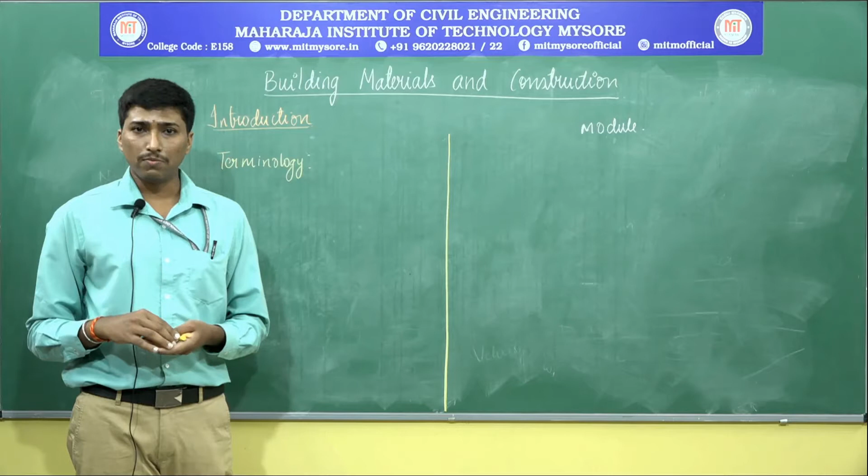Now let us get to know the terminology related to building materials and construction. If you take the term building materials and construction individually, and refer to any dictionary meaning, building refers to the erection of walls with enclosures along with the roof, doors and windows. We call it a building. Whereas material means two or more simpler substances or elements that combine to form a complex substance or compound. This may be either solid or semi-solid in state.

Finally, we come across materials which are naturally available as well as artificially available. Naturally available materials may be in a pure or impure state, whereas artificially available materials are processed especially from raw materials.

Now moving on to construction. What is meant by construction? It is derived from the Latin word 'constructio', meaning together. The term construction refers to the orderly arrangement or assembly of materials in a design or properly planned manner. That is what we call construction.

Now, with respect to these terminologies - building, materials and construction - let us get to know them one by one. What is meant by a building I have already stated. Next is what are the different types of buildings, and why they are necessary. As we know, the basic amenities for human life or habitat to exist for a longer duration relate to food, cloth and shelter. Shelter is a basic amenity for human habitat settlement.

Moving on, why do we require buildings? We need to get protected from cold weather - that means external agencies, even rain, sunlight, snow, or any other extrinsic variables which try to hamper human settlement or habitat. Therefore, a building is an enclosure.

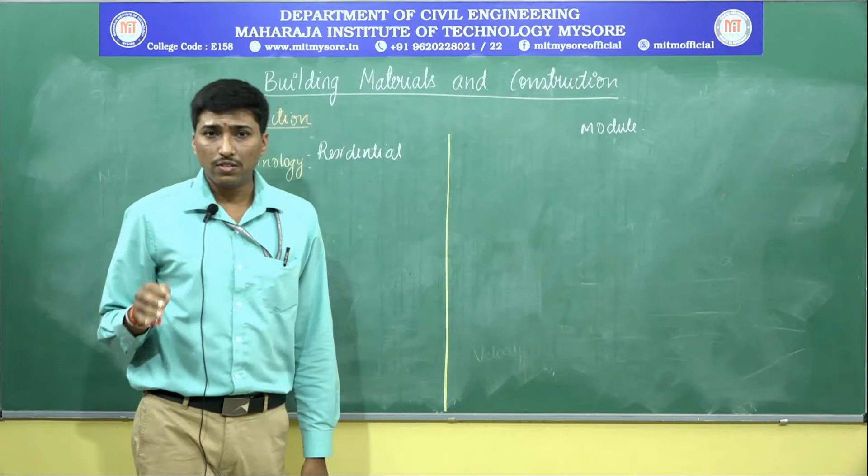And then, if the building is utilized especially for educational purposes, for schools or colleges, then we call it an institutional or educational building.

Next, if a building is completely utilized for the treatment of patients or for nursing purposes, then we call it a hospital or nursing home. Totally, we call this a healthcare type of building.

If the building is normally utilized for recreational purposes, such as cinema halls or theaters, or for cultural activities, then there is a separate category of establishment. Apart from this, if the building is mainly required for industrial manufacturing purposes, then we call it an industrial building.

Moving to the next type, after industrial buildings, the next set we normally utilize is for storage of large portions of manufactured goods or products, or there should be proper arrangement for procurement of raw materials and their placement. For that purpose, proper utilities must be provided. That kind of building is what we call a storage type of building.

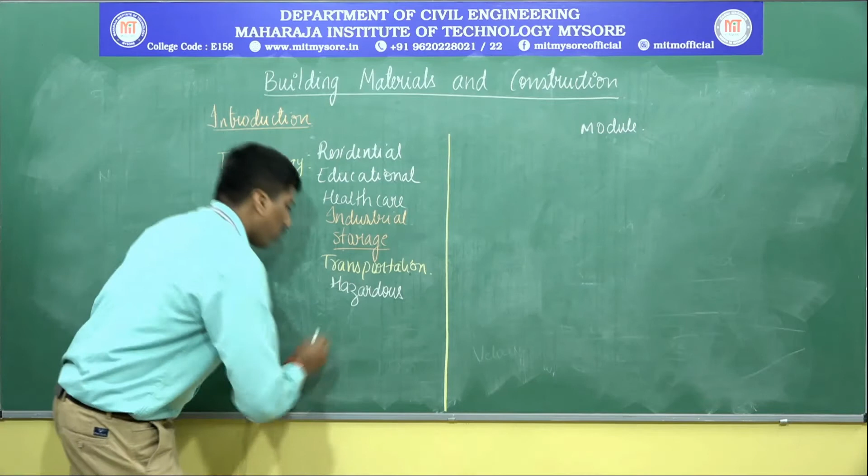Commercial establishments, as I mentioned earlier, we call commercial buildings. So these are the different sorts of buildings that we come across in our day-to-day life activities around us.

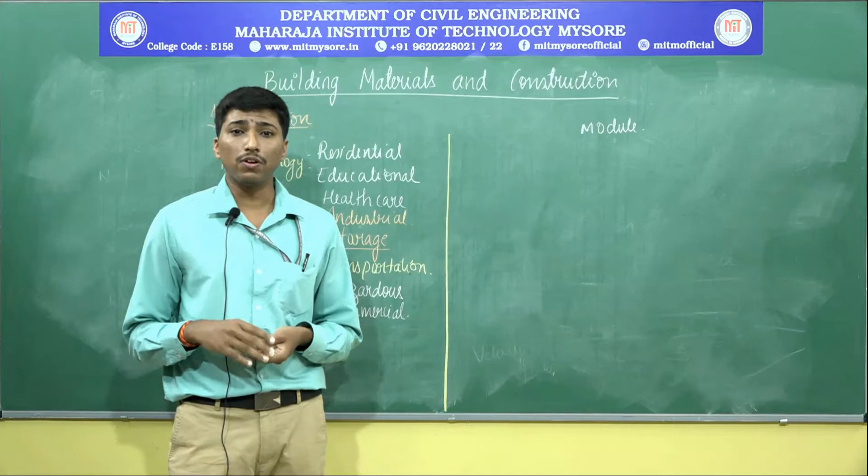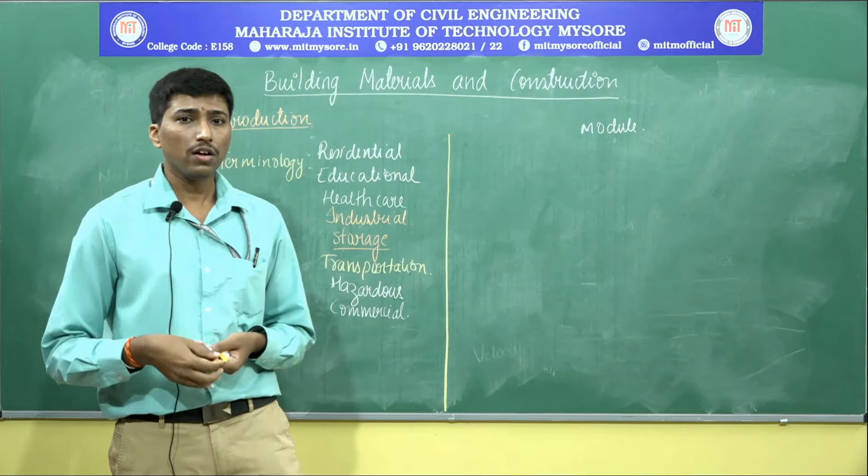Next, if I need to construct any sort of building, I require materials. The materials required for construction, or their selection, mainly depends upon certain parameters. What are those parameters? Let us list them, and then move on to the next part of the construction activities.

What does it refer to? Materials here mainly refer to substances that may be solid in state. This solid type of material has to be orderly arranged, fabricated, well framed and well designed. That orderly arrangement of material is what we come across in the construction phase of any building construction project.

The term 'build' refers to the execution of a task, starting from the planning of any large scale to small scale project, then proceeding to the activities, finally completing them, and leading to the operation and maintenance phase.

Moving on, the materials may be solid materials, which are available in different types. Stone is used as a building material, brick is also used as a building material. Cement aided with water, or cement aided with sand - what we call gravel in layman terms, or technically fine aggregate for sand and coarse aggregate for gravel.

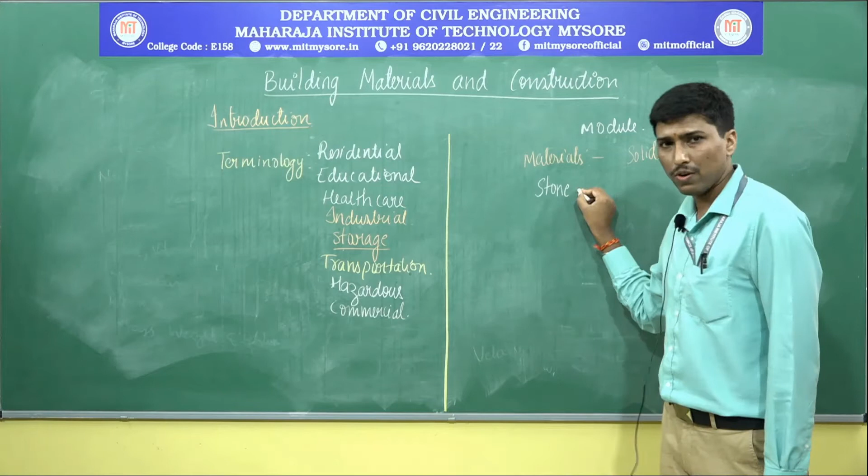Now let us know the list of materials utilized for construction, so it becomes easier for me to explain and convey what you'll study module-wise. So, materials: stone which we use, then we come across brick which is also used as a construction material, and with respect to the next development that took place, it is concrete blocks.

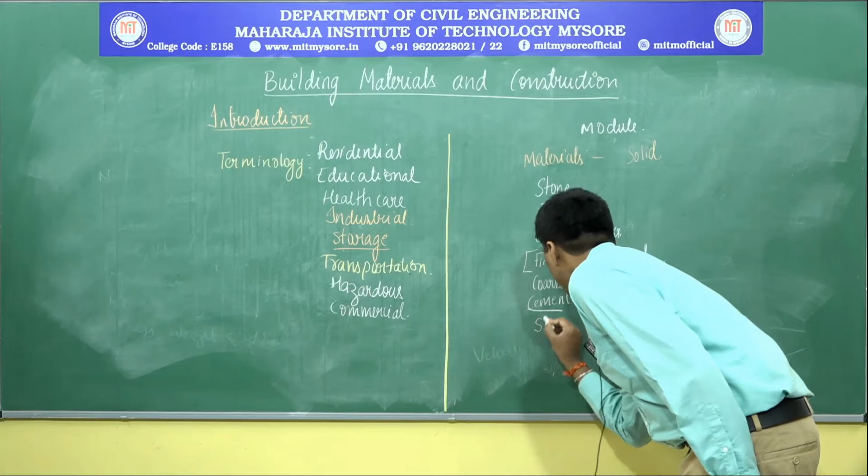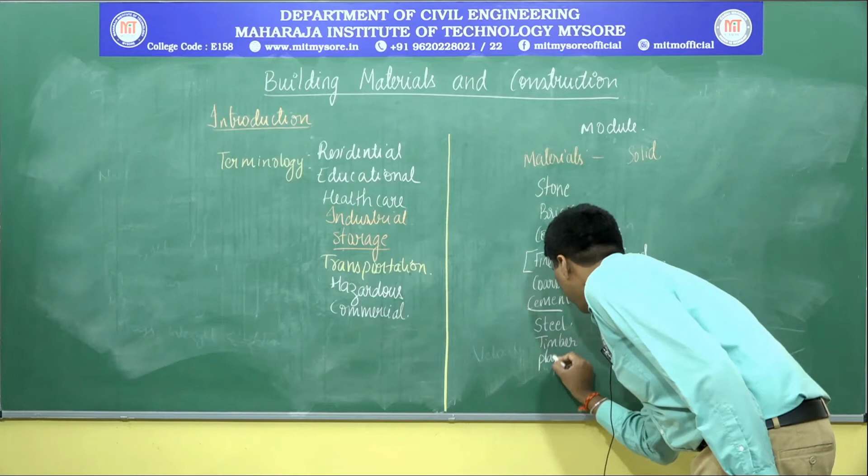Concrete blocks mainly consist of fine aggregate, coarse aggregate - we call it sand and gravel - and cement, which is used as a binding material. Along with this, one important aspect required is steel, and then you use timber and plastics. These are the different sorts of materials we utilize for construction.

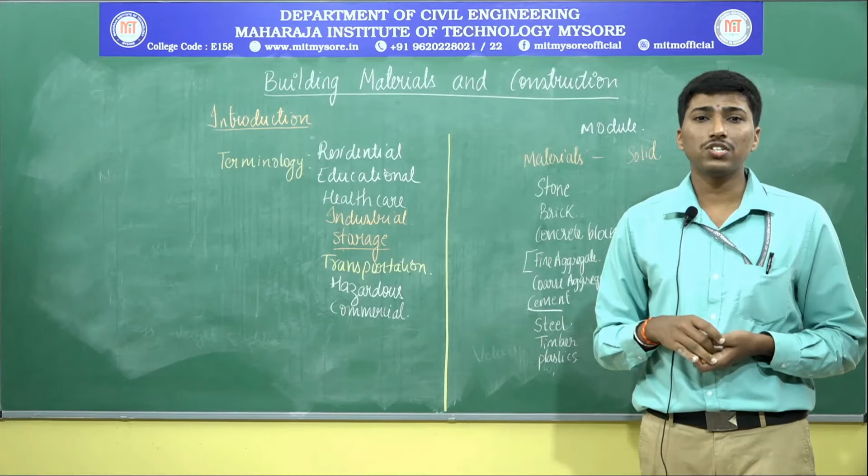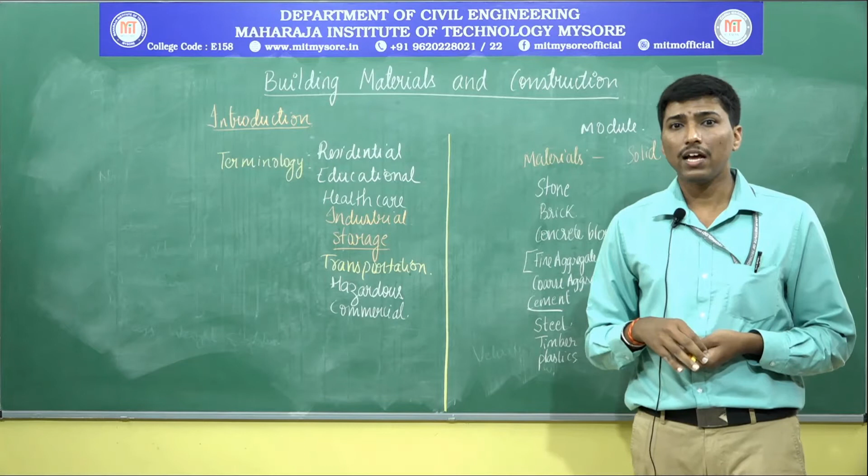Now building I have explained, and the materials utilized for construction activities are also explained. Moving on to the next stretch, what is meant by construction? Construction mainly refers to assembly of materials in an orderly manner so as to give aesthetic appearance and durability, so the life period of any structure will be more, and it is in accordance with the building codes set by local or regulating authorities.

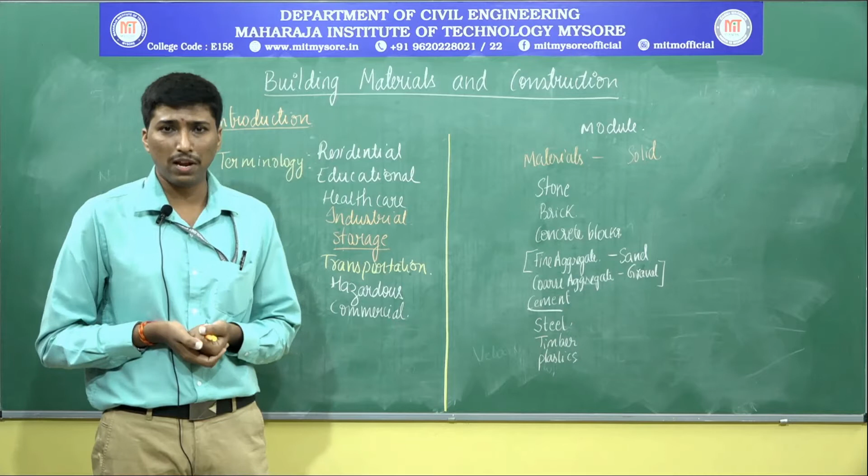Now, moving to the next aspect, it is construction means. Construction involves, in engineering, different sorts of terminology that have been explained. Whatever materials we take in engineering, not only in civil engineering but also in mechanical engineering, we come across different sorts of materials, especially metals, which are utilized to study the nature and the motion.

If you take the case of electronics, they study silicon and allied aspects, the materials needed for building circuits and designing them. Similarly, for a civil engineer, it varies from a small scale house or hut to large scale buildings or multifunctional types of buildings.

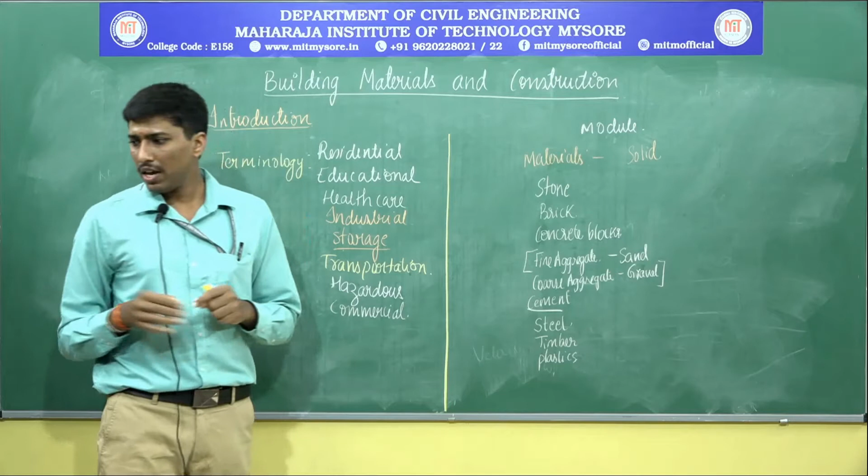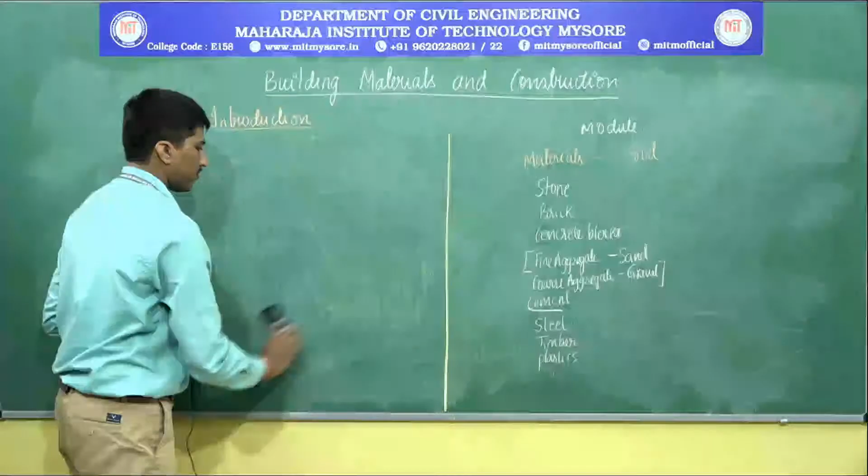Next, in construction aspects, let us get into construction. Mainly it involves proper planning. What does this planning refer to? That means drafting out what things or materials are required, and before you go for the actual construction work.

Preliminary field work has to be done. Later onwards, you go for having an actual plan of what you need to build in that particular place. This proper planning also ensures what kind of materials are required, whether it may be stone or any other sorts of materials being utilized.

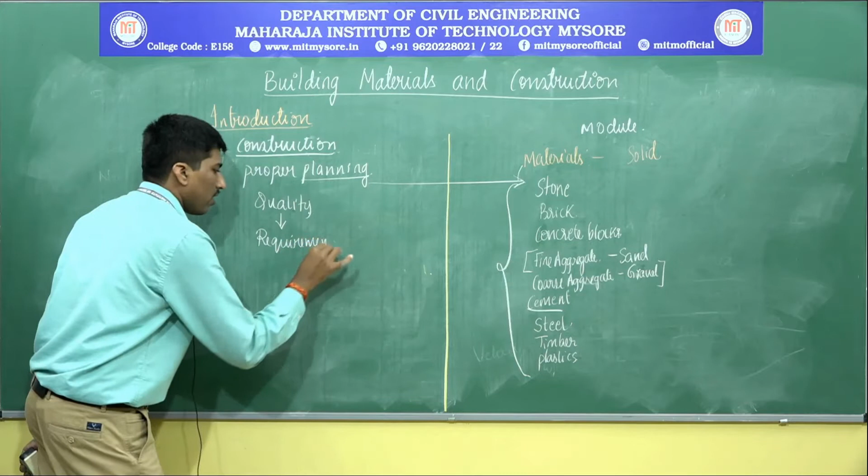Now, proper planning should ensure that good quality materials are utilized for the construction purpose. The quality has to be good, and this is the requirement for every person who resides in their home in a safe manner. If the quality is not good, whatever building materials you utilize, the life period will be much shorter.

The next aspect you're going to study is related to the requirement and the economic concern. What is meant by economic concern? Economic concern is mainly related to utilization of all these materials at an optimal cost.

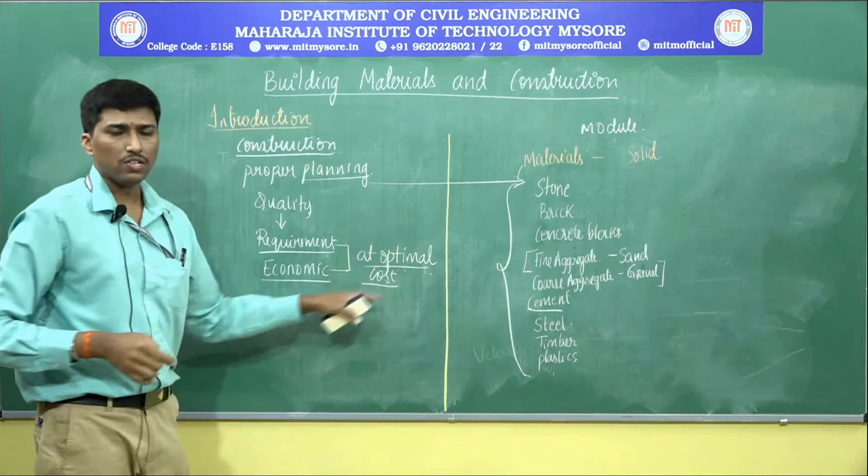It should be much reliable, feasible, easily available, and it should also be reliable, so that whatever cost is being utilized shall not be too much burden for the people, and should not cause any financial deficit for them. So we need to see that financial concern is also a major part of construction activities.

So based upon the quality of materials required, now I have the materials. If you want them for construction activities, raw materials cannot be directly utilized. Instead, you need to synthesize or process the raw materials.

Synthesizing or processing the raw materials will be done either through different sorts of industries, or they will be naturally utilized, or artificially driven up, or finished based upon the customer's requirements.

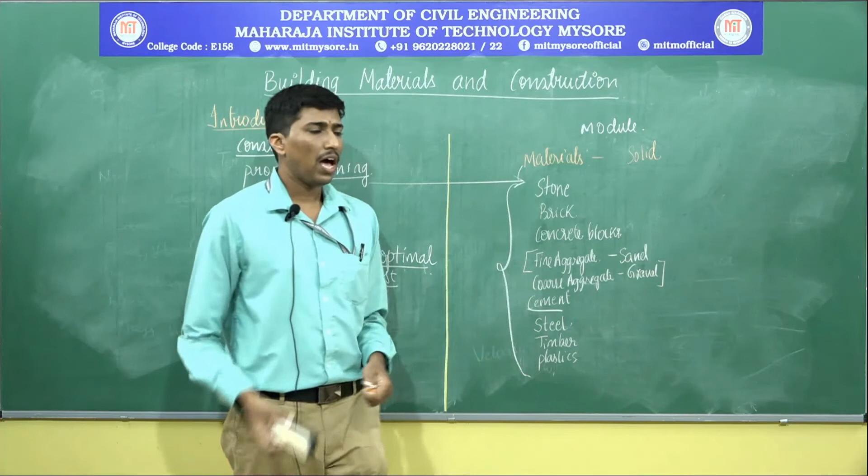So here mainly we need to look at the concept of how materials are available. If the materials are available in raw form, how do you need to convert them into a usable form? So whatever raw materials are available, they are to be processed, and after processing or synthesizing, we come across getting the desirable product as an output.

This desirable product is the major concern for the utility of the work.

Any material you take, whether it may be stone, is not normally available directly, so they need to go for quarrying. Next, they need to blast the rocks available in the earth, and extract it, and further get the desirable product before it can be utilized. Similarly, in the case of brick, concrete blocks, cement, fine aggregate, coarse aggregate, or ceramic materials, all those things.

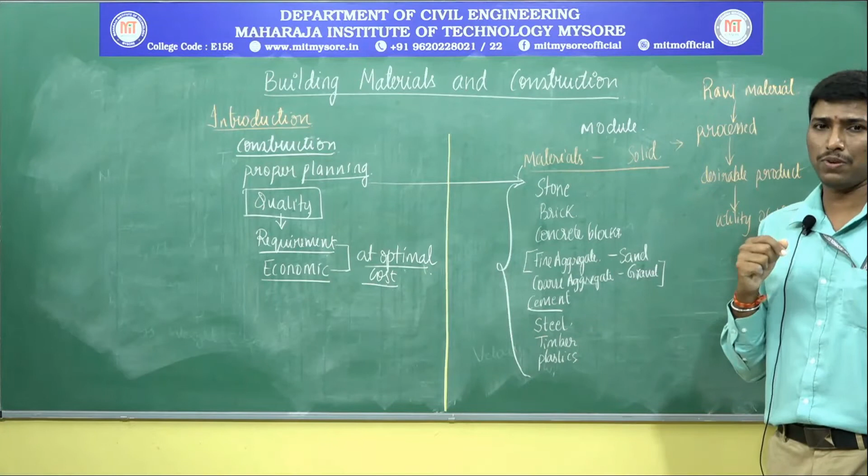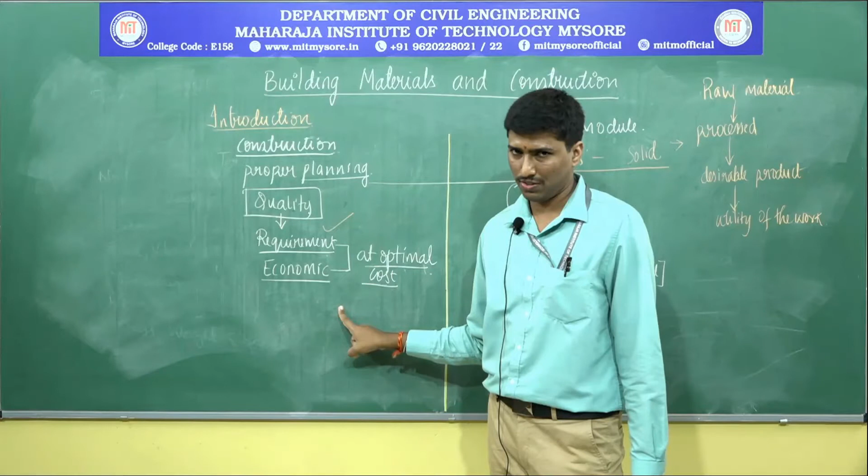Therefore, if the materials are not in good condition, or possess impurities which cause harm for construction purposes, the durability after construction will be less. In that aspect, we need good requirements, and that is one of the essential parameters for quality, especially the good requirements and economic concerns related to this. I hope you understand this concept, how it is related.

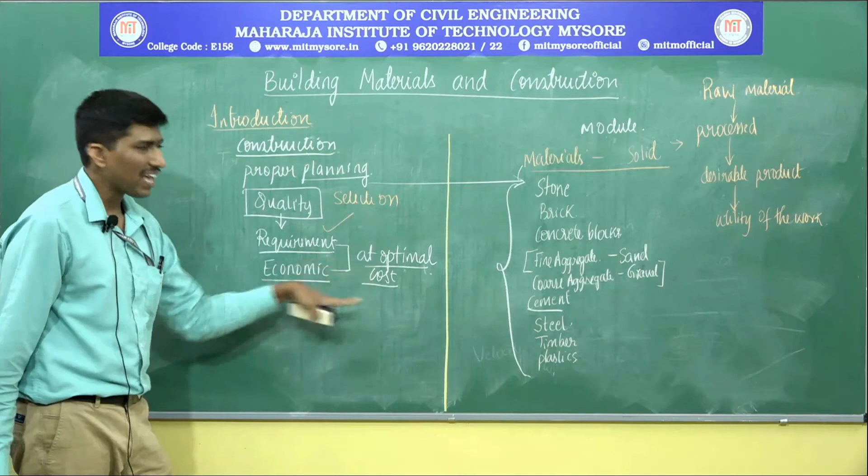The construction phase requires selection of material based upon quality. If the selection of material is good, the quality is also good, and the requirement is matched. Next is related to economic concern. So this particular part of the cycle involves the complete construction aspects.

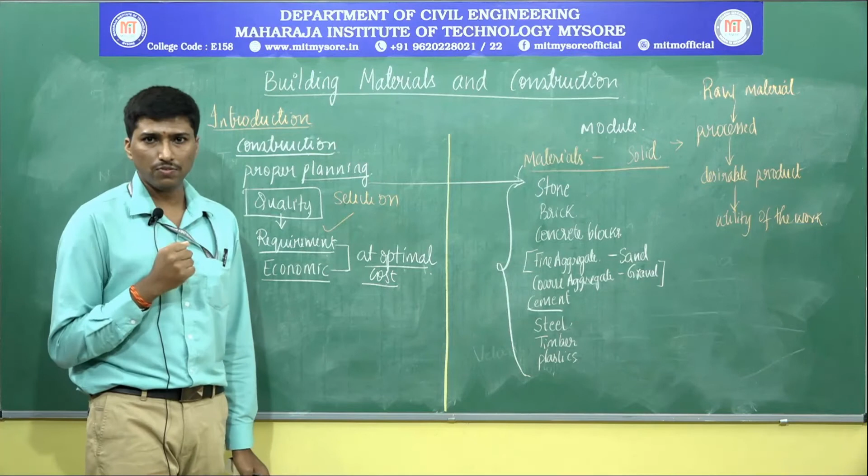Moving on to the next aspect, what are the different things you need to study here? This course gives an outline regarding the concepts of building amenities or portions, starting from raw materials, selection of raw materials based upon requirements, and finally utilization or supervision of those materials - how they are to be arranged, how they are to be designed, and how they have to be executed with masonry works. What are those contents? Let us get to know one by one.

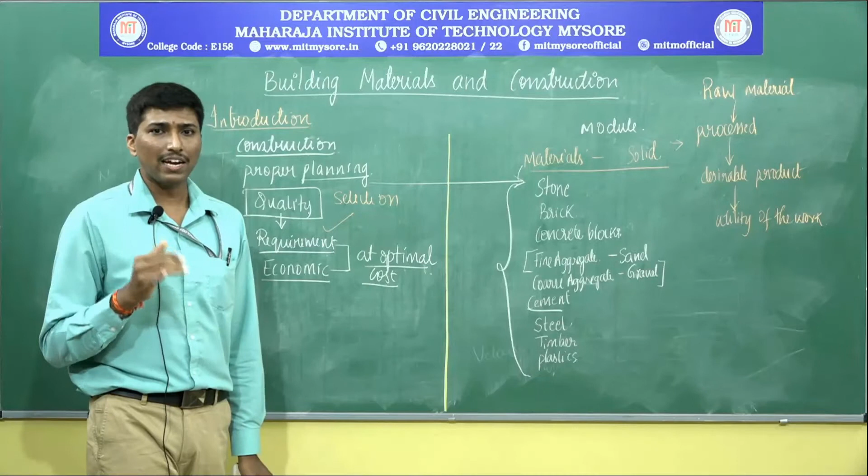The building materials and construction course mainly emphasizes the different exposure of materials utilized for construction, based upon selection of the earthen ground, and then which kind of materials are used, starting from the substructure or foundation, then the plinth level, erection of walls, placement of beams, and final coverage of the roof, provision for proper ventilation, doors, openings, and lintels. These are the things you're going to study in the basic part of building materials and construction.

The next part is the finishing part. Once materials are selected, construction and execution happen one by one, and finally the finishing part comes. Why is finishing a major concern? Because it has to look aesthetic, provide proper airflow movement, proper sunlight entry into the home, protection from weathering agencies, and safety of people against theft or other aspects, as well as safety from natural calamities. The finishing part relates to plastering, pointing, and later the painting aspects.

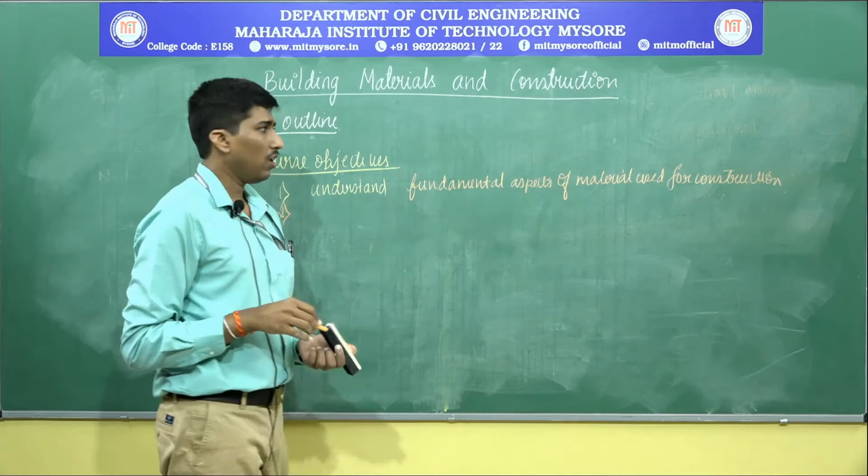Second, once raw materials are known, the next thing is foundation or exploration of the soil, and site selection, for selection of suitable soil for construction purpose. This selection mainly involves testing of the soil and exploration for which particular part of the soil you can go for construction, whether small scale or large scale, starting from a small house like 20 by 30, or maybe 80 by 100 sort of sites, how to go for planning or execution of the projects, how much foundation is required, which kind of soil is present, and how it reacts with respect to loads. That is what we come across in structural components.

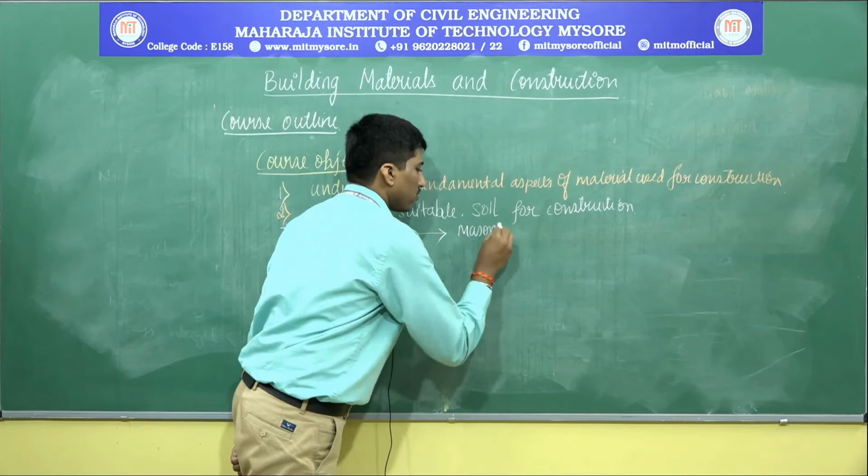Third, it is related to study of the masonry walls, so application of materials especially in studying masonry walls and their bondings.

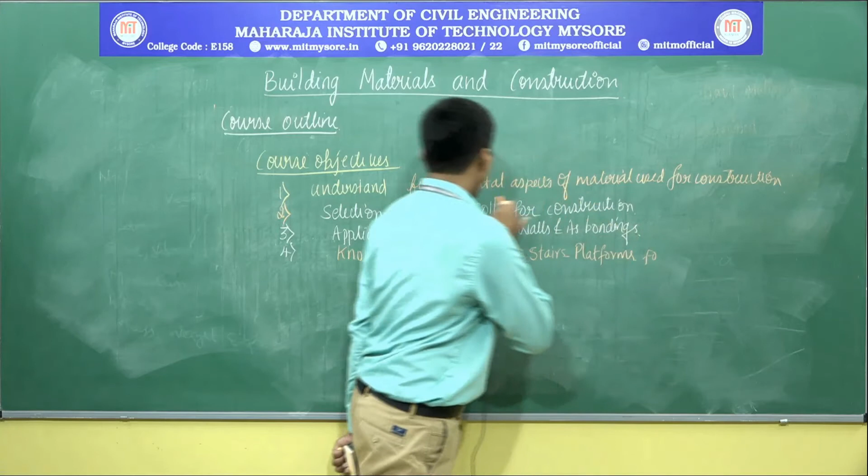Fourth aspect is mainly related to the type of finishes employed in construction activities. It may relate to the designing aspect itself, to cover the designing aspects of, especially, the stairs, provision of platforms, even designing of foundations also, which you are going to study after this. In addition, you come across floors.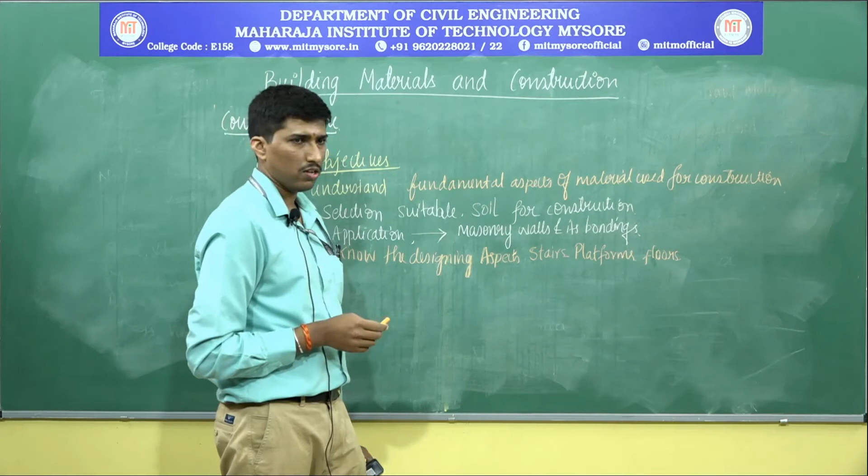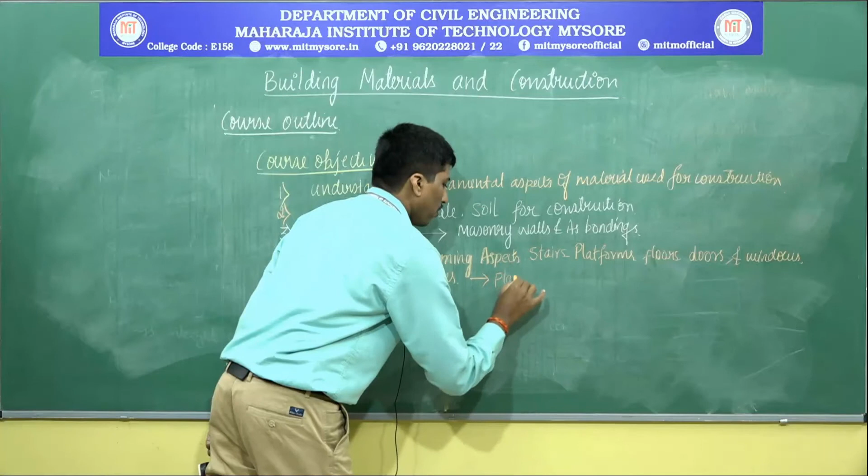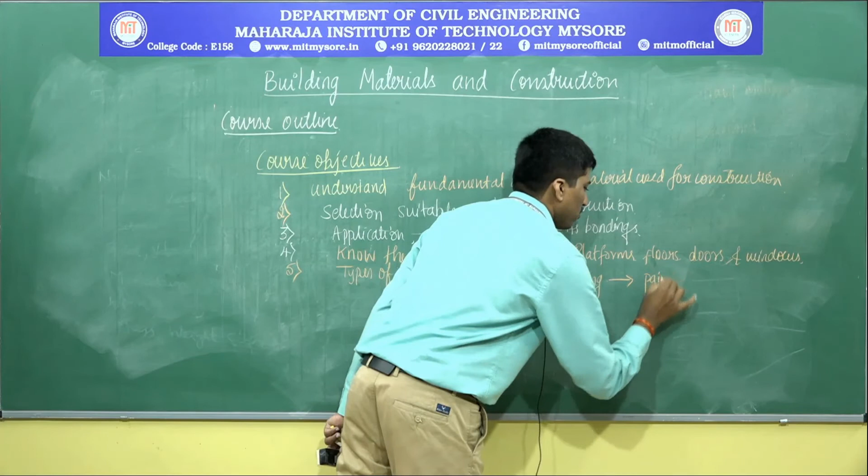Finally, the types of finishes, which also include doors and windows, starting from the form work, plastering and pointing, and finally the house looks beautiful when it has been painted. These are the course objectives you are going to study in building materials and construction.

Now, what are the course outcomes that you come across? The basic thing is, when you understand this, you will be applying those concepts, related to the application part, to know what materials are used for suitable purposes. Next, you need to recognize the major fundamental aspects of selection as well as designing considerations used for buildings.

Finally, whatever repair works come after the construction phase of the building is another major objective set as an outcome, where you come across whatever repair works, restoration, or retrofitting has to be done. These are all the set of amenities you're going to study related to building materials and construction on a basic and fundamental level.

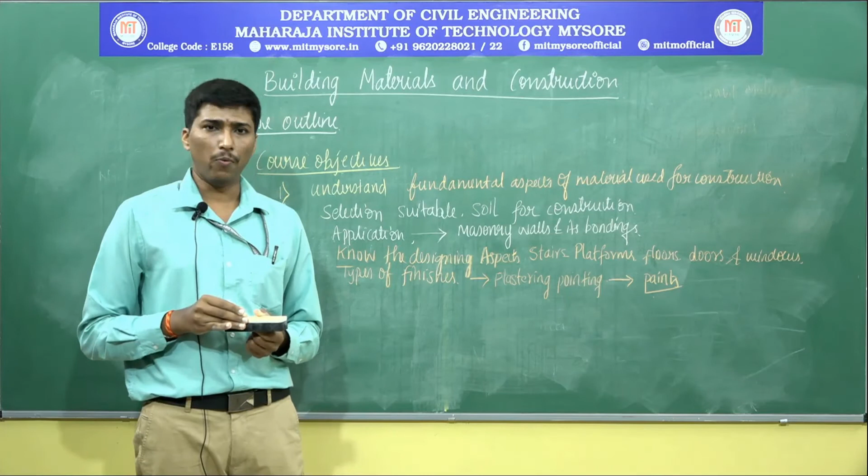Now, let us move on to the contents of the module, what are the things that you're going to study in building materials and construction.

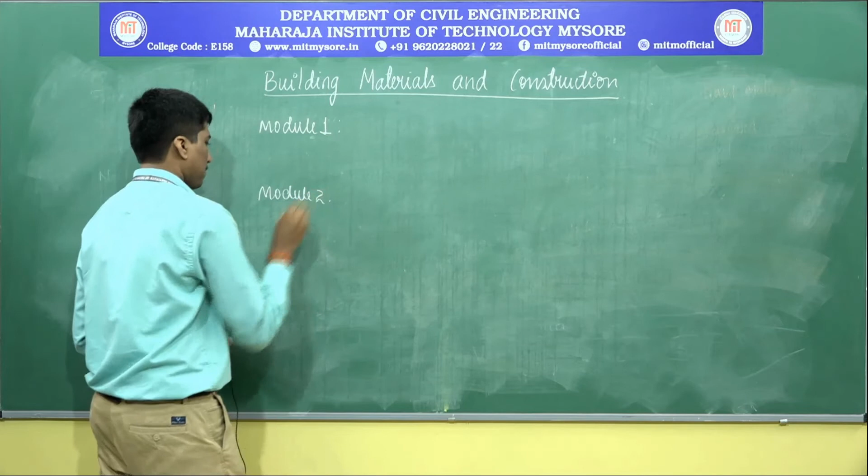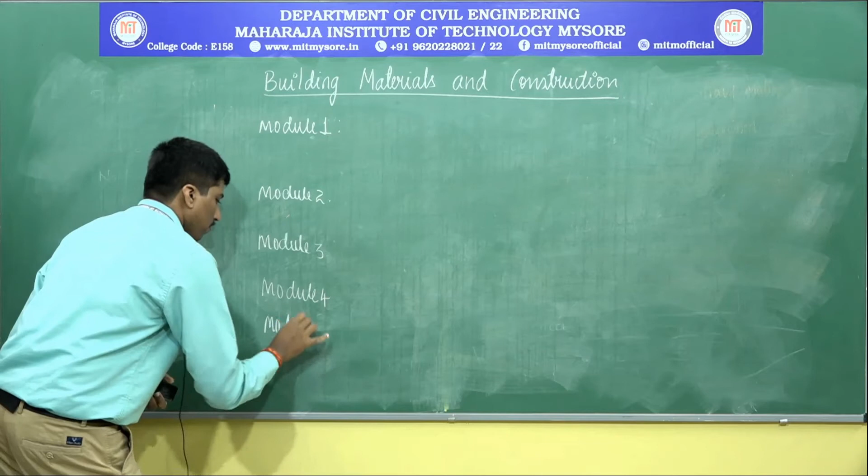Now, contents of the module, you're going to study in module number 1: stone as a building material, and how it is not manufactured but rather excavated from natural rock beds, then finished and utilized for construction purposes. Similarly, bricks, and then for larger scale, concrete blocks and mortar - these are the first part of the subject in module 1 that you're going to study.

Second one that you're going to study is related to timber, how it is processed, and what are the different types of wood used for construction utilities.

The third aspect you're going to study is mainly related to fine aggregate and coarse aggregate - the components and occurrence of sand, how it is processed and utilized, whether in an artificial manner or naturally. Coarse aggregate is also crushed at the quarry site itself, making it a manufactured part. Next, you'll study the special case of fine aggregate, especially manufactured sand, or what we call M sand.

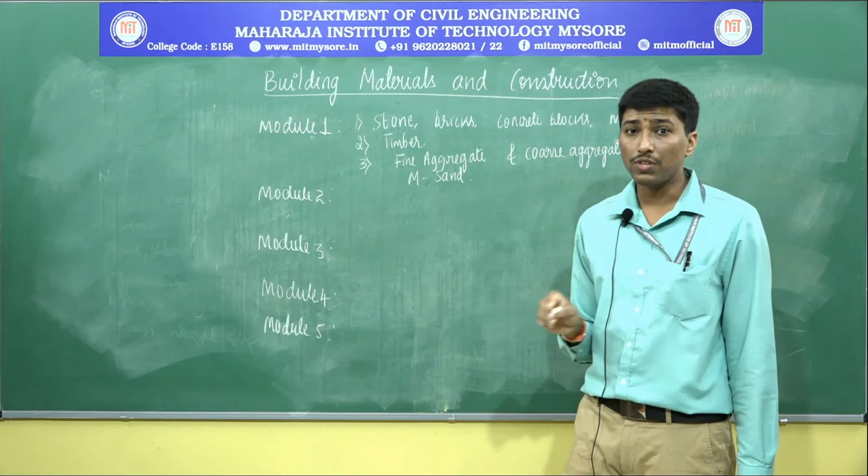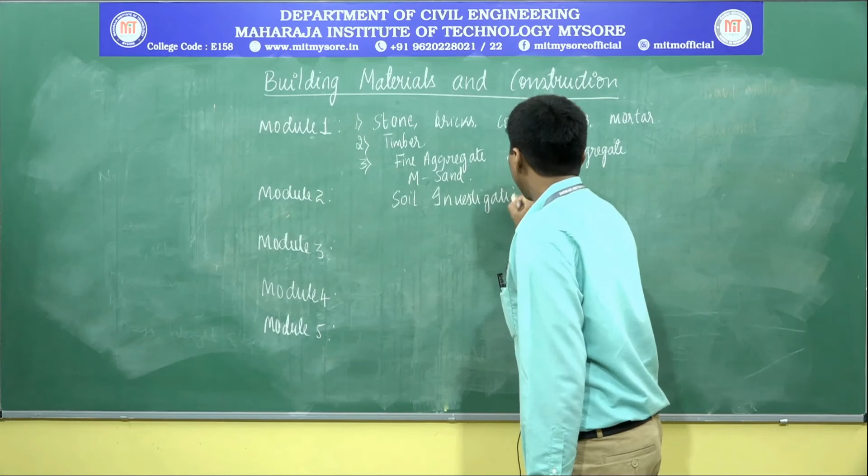Next, in module number 2, mainly study related to foundations. Before laying any foundation, which is a substructure, you need to determine what kind of soil is present where you're building, whether large scale or small scale. So mainly soil investigation and exploration, and then the foundation.

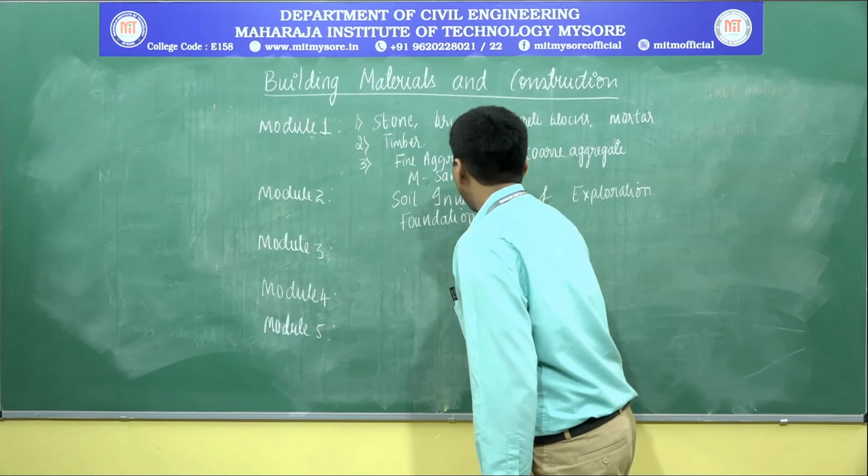After this, you go for studying the concept of masonry. Masonry means one complete unit of building using material uniformly taken for construction activities - especially, we call it stone masonry, and we're also going to take normal 20 or 30 size brick masonry along with concrete. So types of masonry you'll study are mainly stone as well as brick masonry.

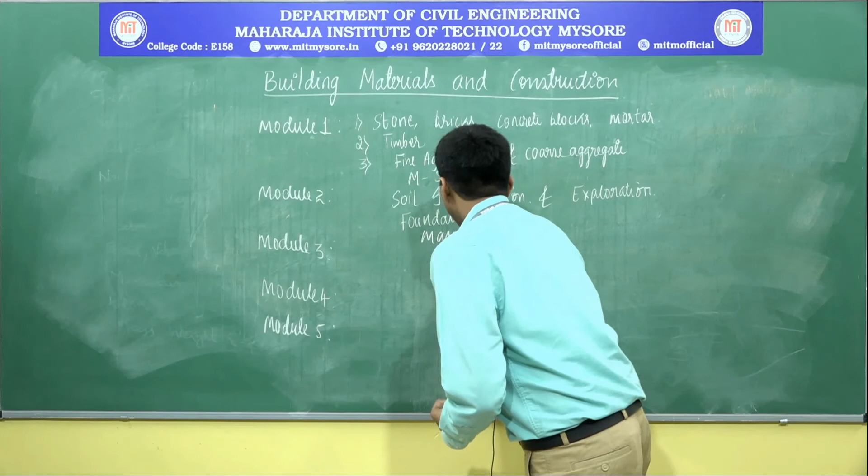Next thing you come across is related to masonry and bondings. In module number 3 you study related to lintel, arches, and then you also study related to the roof. Even the floors are also coming into the picture.

In module number 4, mainly we come across doors - which kind of doors are being provided - windows, ventilation, all these aspects that you're going to study.

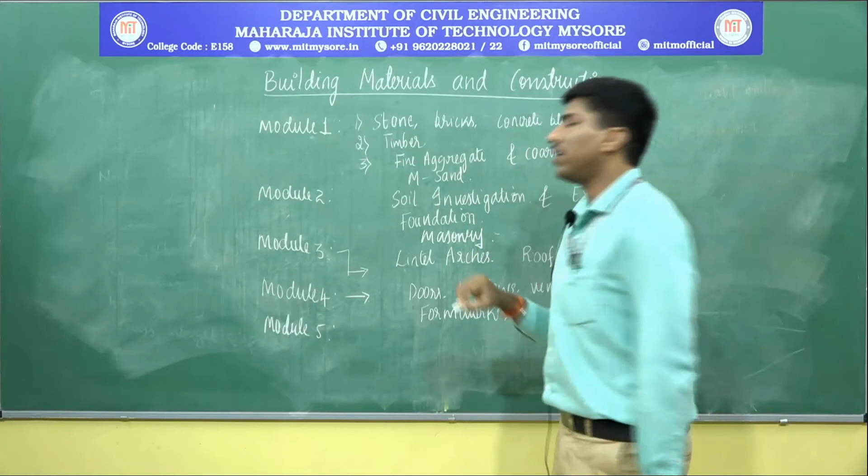In addition to this, the formwork component - a temporary structure utilized especially for supporting during the construction phase of the building - is what we come across as formwork. In formwork, we also come across shoring, scaffolding, underpinning, all these aspects, especially if you need deep foundations where an already built building is present, so you need underpinning. Shoring and all those things you come across under the heading of formwork.

Next, in module number 5, mainly dealing with plastering and pointing - the outer covering portion is what we call plastering. Pointing means where cement mortar is used to join or bind two consecutive materials. Plastering, pointing, and then we come across paints and damp proof materials.

So these are the different portions of the subject, starting from raw material usage, execution of the part, and finally building of the masonry walls and all. Here also we come across cavity walls, different masonry walls, whether a partition wall or a load bearing wall - all these things you're going to study here.

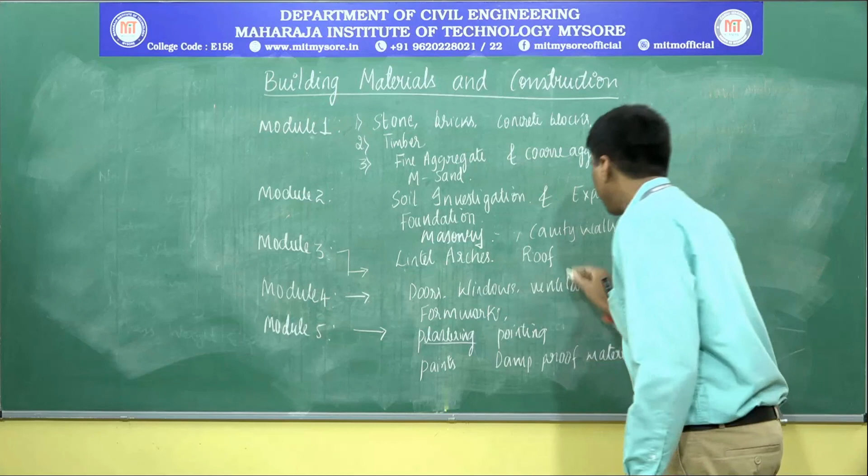Lintels and arches, and therefore the roof, floors also - which kind of floor finishing is required. Module number 4 mainly speaks related to doors, windows and ventilation utilities with the formwork - another phase of construction - and finally the finishing of the building is done with plastering, pointing and painting. Therefore, the whole building materials and construction subject is divided into 5 modules comprising all these amenities.

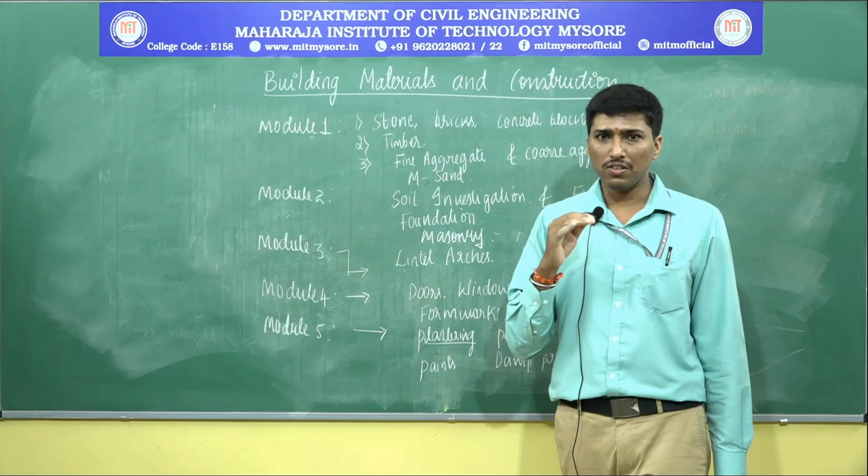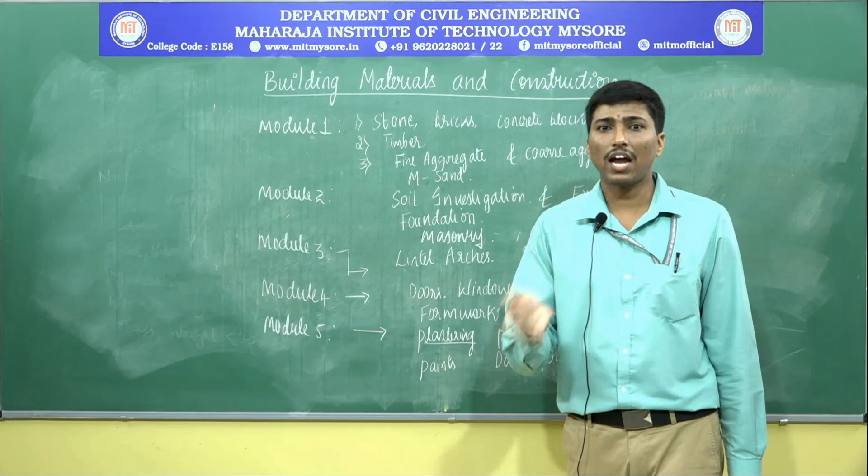I hope you've understood the basic concepts and necessity of buildings, why materials are utilized for construction purposes. In the next class, let us get to know in module number 1 which kind of material was utilized in olden days, how it has survived till date, and how some old renovated materials still thrive to exist today. If you're curious about it, stay tuned. Let us get into the next part of the class. Thank you one and all.